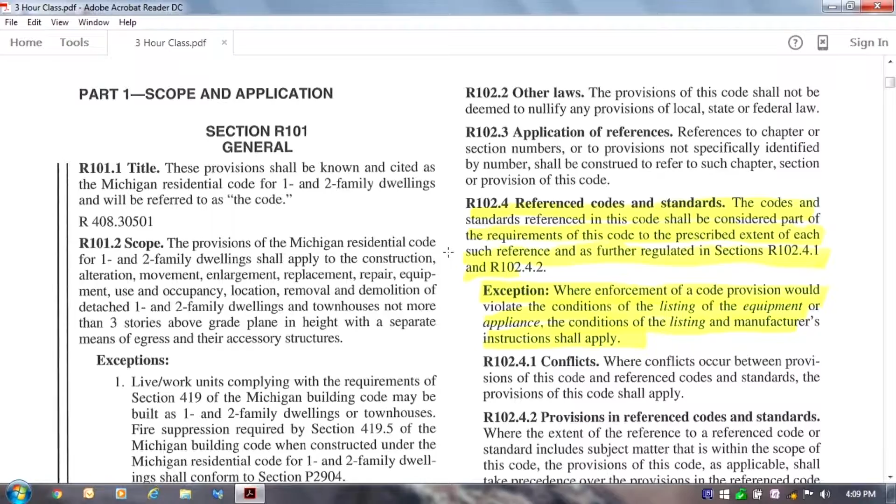Exception: where enforcement of the code provision would violate the conditions of the listing of the equipment or the appliance, the conditions of the listing and manufacturer's instructions shall apply.

The reason I want to point this one out to you is that in some situations, people often feel that the building inspector's word is the last word on the subject, whereas when it comes to the actual installation of products, it's the manufacturer's recommendations that are normally followed, even by the building department.

This is going to be a big plus in the 2015 building code because you're going to see that you're going to have to provide documentation on various aspects of the construction trades and materials that we didn't have to apply before. I'll point that out to you shortly.

One of the things you're going to notice as we go through the code is in reference to the changes. When you see one line in the margin, that references it's a change from the previous code, which is the 2012, keeping in mind the 2009 isn't marked yet. When we have two lines, that's specific to the code change for the reference of Michigan.

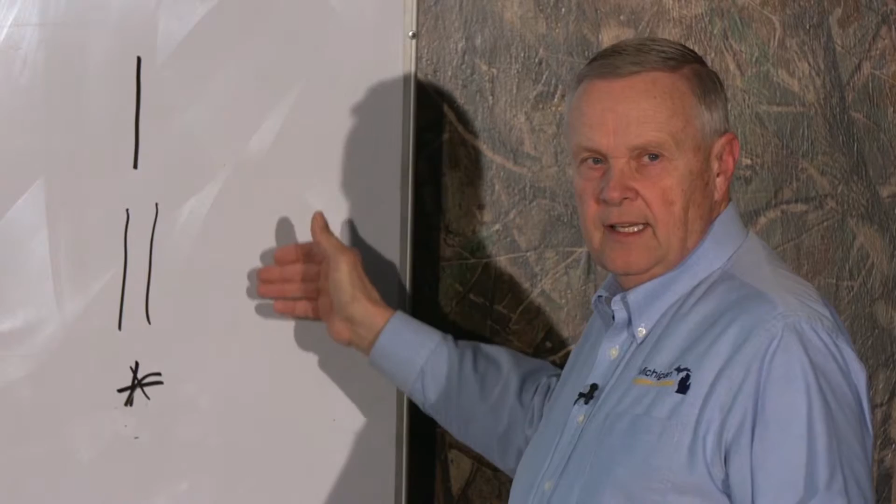There will be other symbols and signs as well. When you see an asterisk, it means that section's been deleted, it's not used any longer. But for our purpose, we're going to be studying a lot of the one-line and two-line changes, and those that were not included from the 2012 code. The next one we're going to talk about is on page 2, manufacturer's installation instructions.

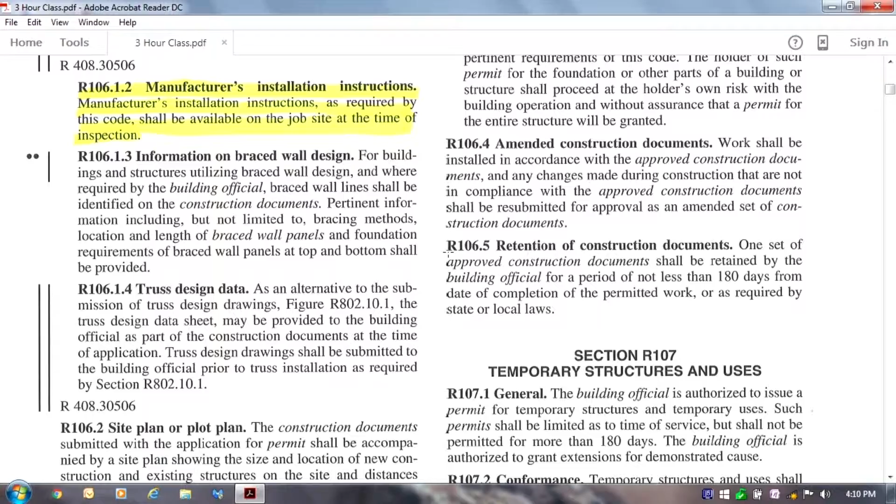Manufacturer's installation instructions as required by this code shall be available on the job site and at the time of the inspection. So now you're going to have to start keeping these manufacturer's installation instructions, whether it be siding, roofing, windows and doors, anything that has manufacturer specs on how to install, you'll have to keep that on site.

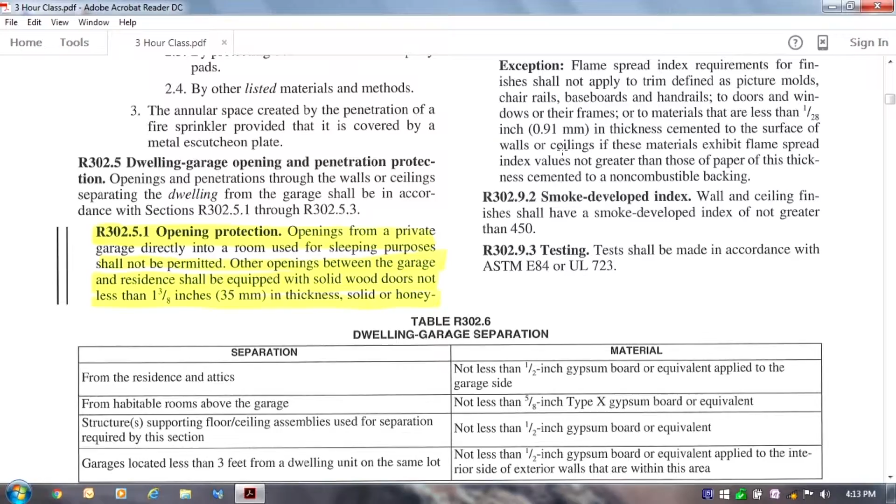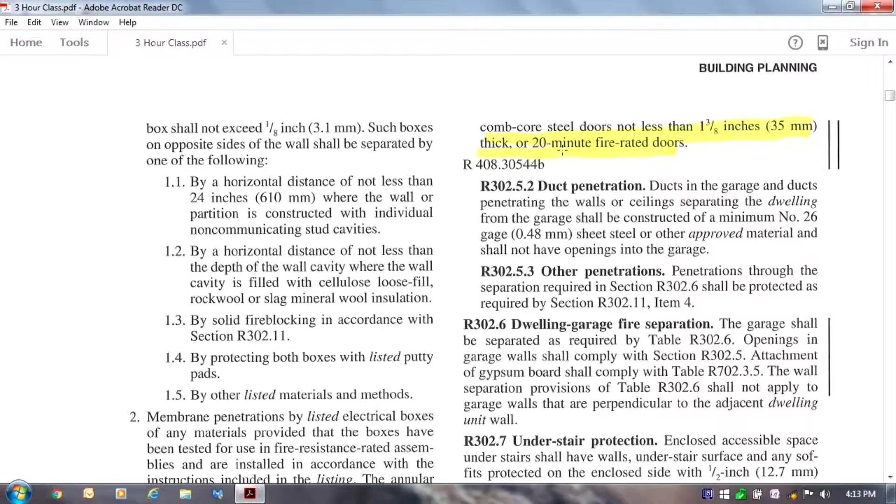The next one we'll cover is on page 7, down at the bottom left. It says 302.5.1, opening protection. Openings from a private garage directly into a room used for sleeping purposes shall not be permitted. Other openings between the garage and residence shall be equipped with solid wood doors not less than 1 3/8 inch thick, solid or honeycomb core steel door not less than 1 3/8 inch thick, or a 20-minute fire rated door. I want to draw your attention to the 20-minute door.

When you purchase a 20-minute or steel door from whoever you purchase it from, make sure that you get a listing that it is a 20-minute door - it can withstand fire for at least 20 minutes. Failing to do so may knock down your inspection when they come to check out that separation door.

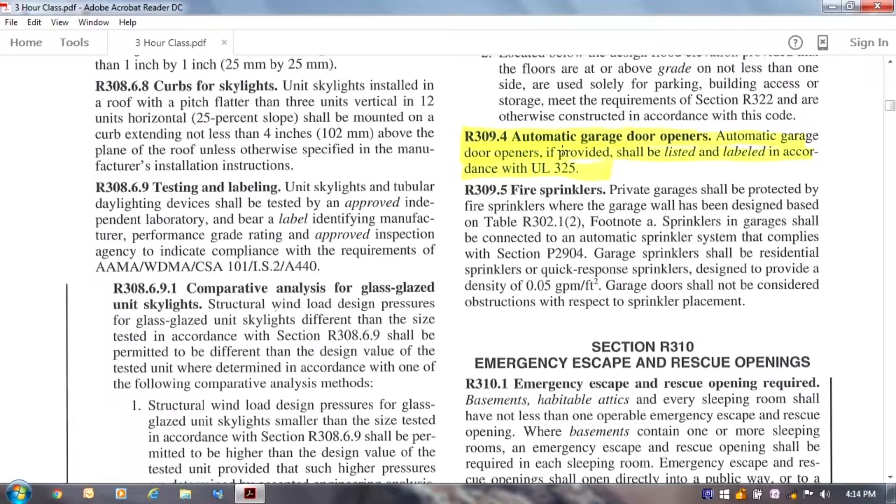Next page. This is one of the changes: automatic garage door openers. Automatic garage door openers, if provided, shall be listed and labeled in accordance with UL 325. So in reference to 309.4, make sure that you keep that listing that's either on the box or on the operator's manual to prove to the building inspector on your inspection that you meet UL 325.

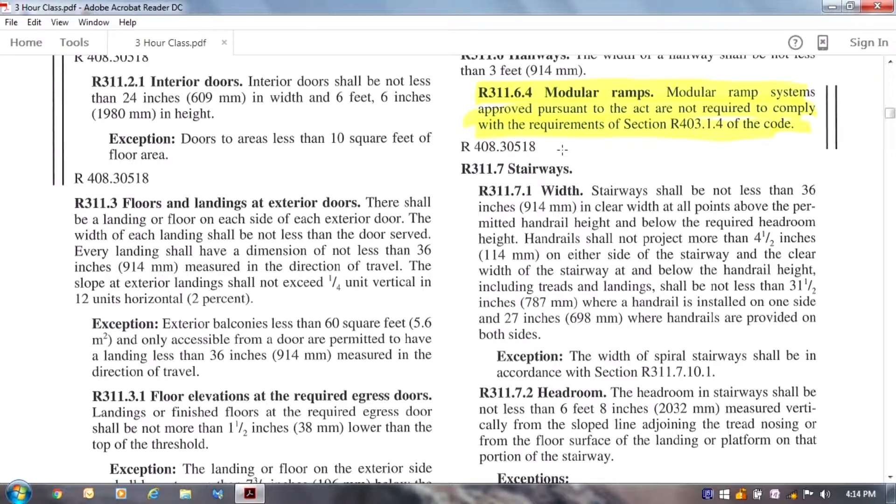Next page, on the right, 311.6.4, modular ramps. Modular ramp systems approved pursuant to this act are not required to comply with the requirements of section 403.1.4 of the code. What is 403.1.4? Well, that's dealing with the foundations that we normally have to do for permanent ramps. When we do modular pre-made ramps, we no longer have to do the concrete footings. We install that modular ramp according to the manufacturer's specifications.

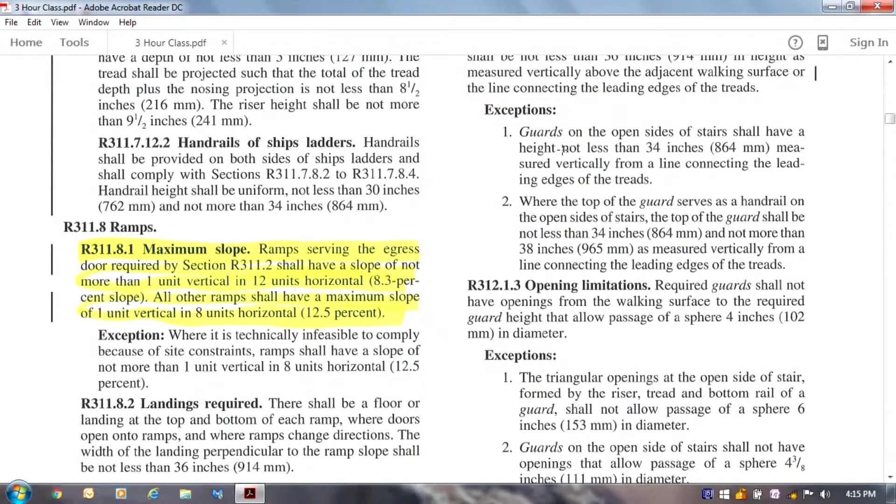Next one down, go to page 311.8.1, maximum slope. Ramps serving the egress doors required in section 311.2 shall have a slope of not more than 1 unit vertical and 12 horizontal. All other ramps shall have a maximum slope of 1 and 8.

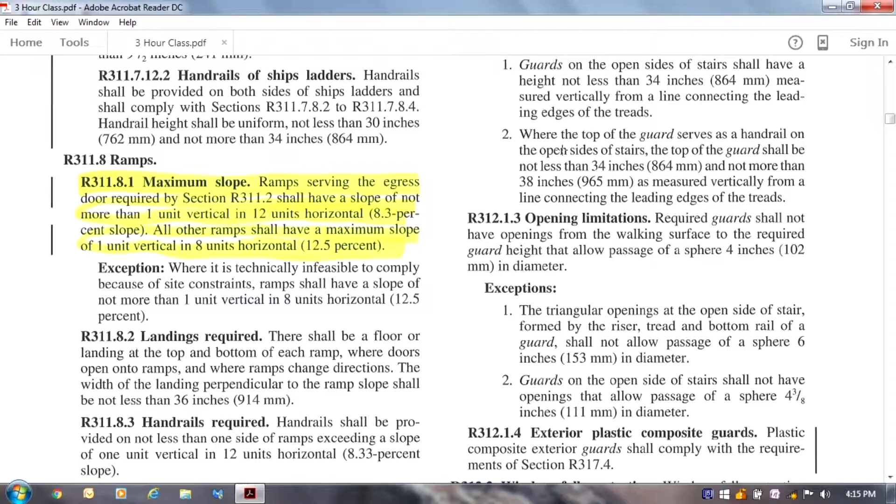Now, I'm touching on this one, even though there is a code change on this one. I want to draw your attention to the fact that this is a typical ramp used by anybody. If you are going to do an ADA or barrier-free design ramp, then you have to follow those specifications, which are much more stringent than this one. Okay, be cautious on that. If you're doing a ramp for a handicapped person, follow the barrier-free design rules or the ADA requirements.

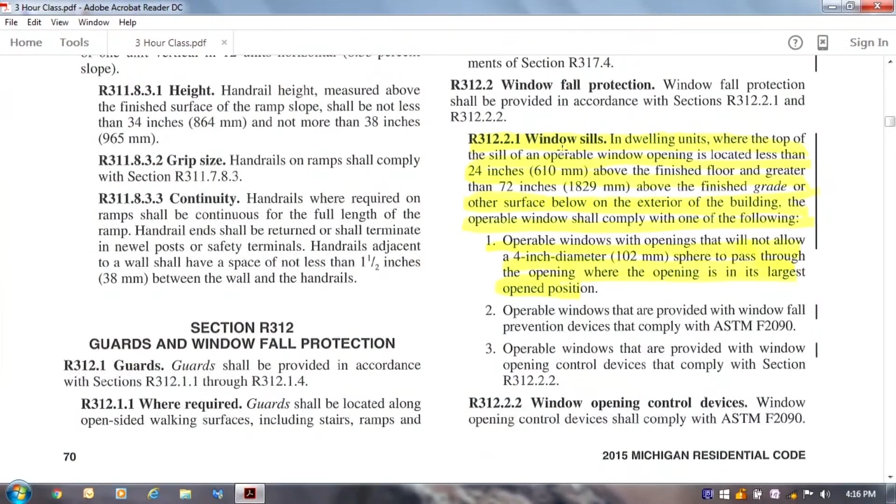On the right-hand side, 312.2.1, window sills. In dwelling units where the top of the sill of an operable window opening is located less than 24 inches above the finished floor and greater than 72 inches above the finished grade or other surface below on the exterior of the building, the operable window shall comply with one of the following. We'll do number 1: operable windows with openings that will not allow a 4-inch diameter sphere to pass through the opening where the opening is in its largest open position.

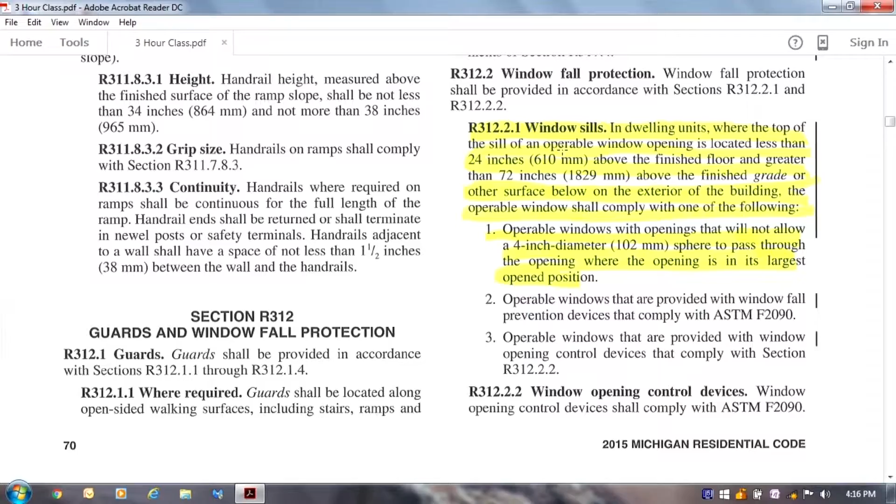This section was moved over to this particular location from the 2009 code, and some changes were made to it. Now, I want you to picture in your head that you have a second-story house, you have a large window, and the bottom of the window opening is within 24 inches of the floor, and the outside sill is more than 6 feet above the grade. That window has to have a limiting opening device on it where a 4-inch sphere cannot pass through it. Once again, that's basically, if you think about it, that would be for child protection from a child falling out that window.

On the next page, a new section dealing with elevators and platform lifts on the right, R321. Elevators: where provided, passenger elevators, limited use, limited application elevators, or private residence elevators shall comply with the Michigan elevator rules. Platform lifts: where provided, platform lifts shall comply with the Michigan elevator rules, that section.

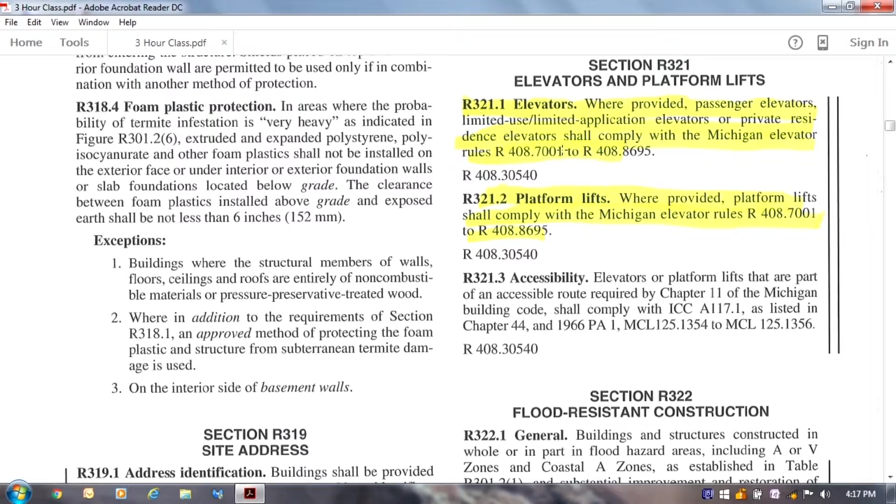Now, this was a major change because it wasn't covered before, and what we're starting to see is the replacement of a lot of ramps with, for lack of a better word, wheelchair lifting devices, outdoor lifting devices, and a lot of times these can be bought secondhand on Craigslist or other various websites. People were installing these sometimes on their own or by getting a local contractor or electrician to install them, where now they have to comply with the elevator rules for the state of Michigan.

Next page we'll go to is section 403.1.1, minimum size. The minimum width and thickness for concrete footing shall be in accordance with that table and those figures. The footing width shall be based on the load-bearing value of the soil in accordance with table 401.4.1, and footing projection shall be not less than 2 inches and shall not exceed the thickness of the footing.

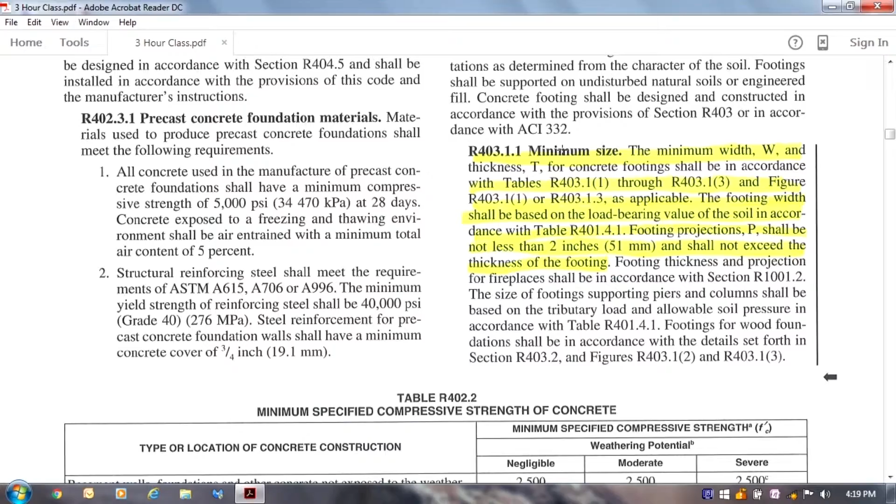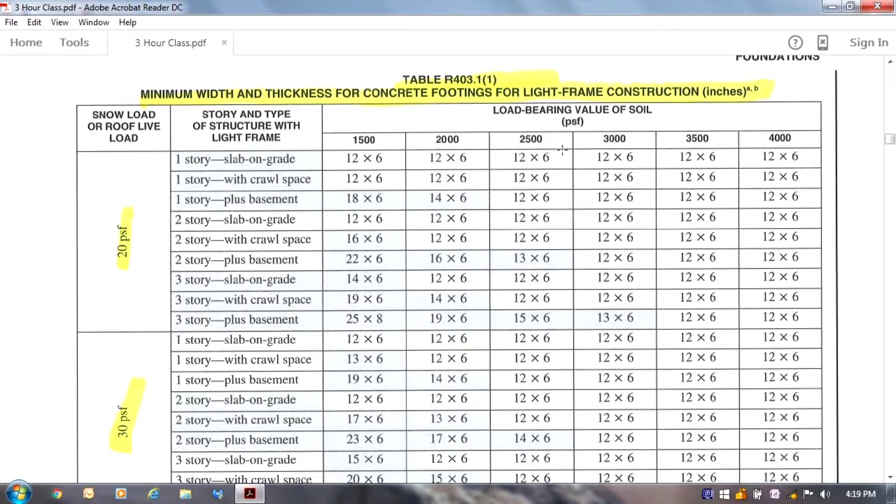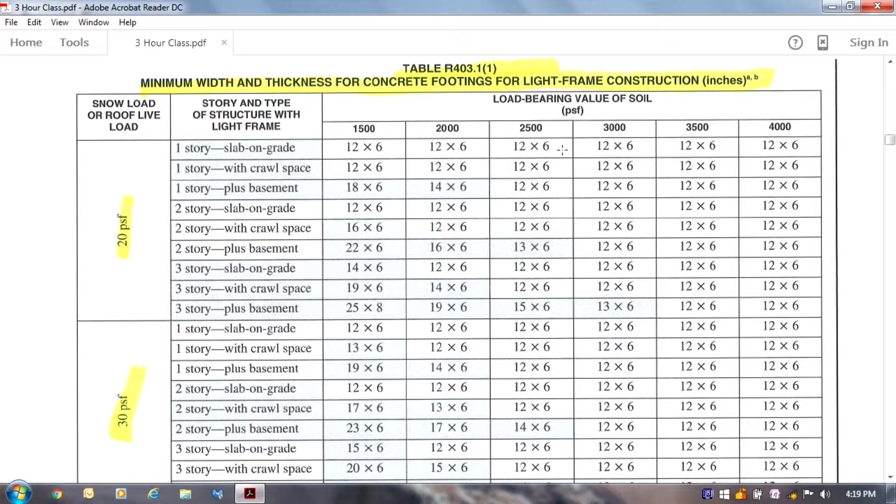Let's just go to that next section so we can see what they're talking about here. Our footing designs now have to include some allowances, and we need to know the snow load requirements for that zone. This is all new to the building code, 2015 code. So let's just pick one example.

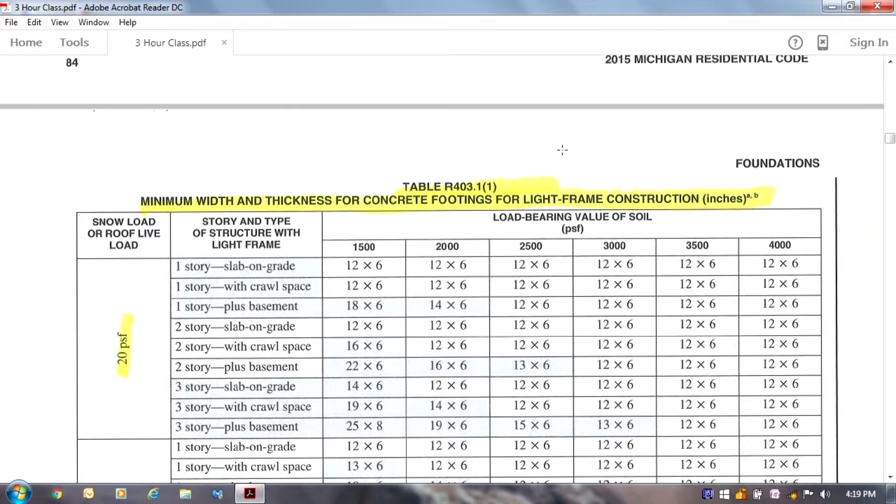Go on the left-hand side, we're going to do table 403.1 subparagraph 1. On the far right it says minimum width and thickness for concrete footing for light frame construction. Light frame would be with no brick on it, just vinyl siding of some sort. If you go down on the left side where it says a 30-pound snow load, and we'll do the one that says 2-story plus a basement. If you go to the right, we need to know what the ground bearing capacity of the soil is.

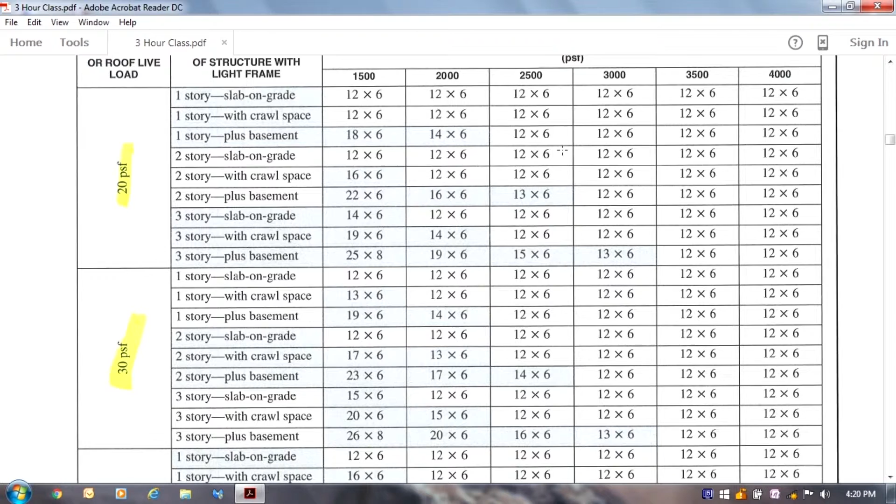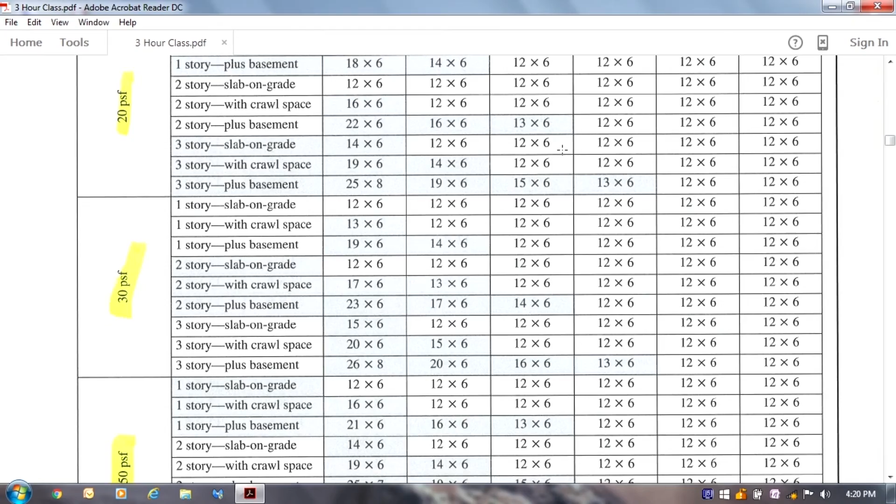So let's say from soil borings we know that the soil bearing is 1,500 PSF. Based on that requirement, on a 2-story plus a basement, our footing would be 23 inches by 6 inches thick. For comparison, if you look at the 20-pound snow load above it and go to where it says 2-story plus a basement, it's 22 by 6. So we're an inch less on a 20-pound snow load. As the snow loads increase, the width of the footing is going to increase also.